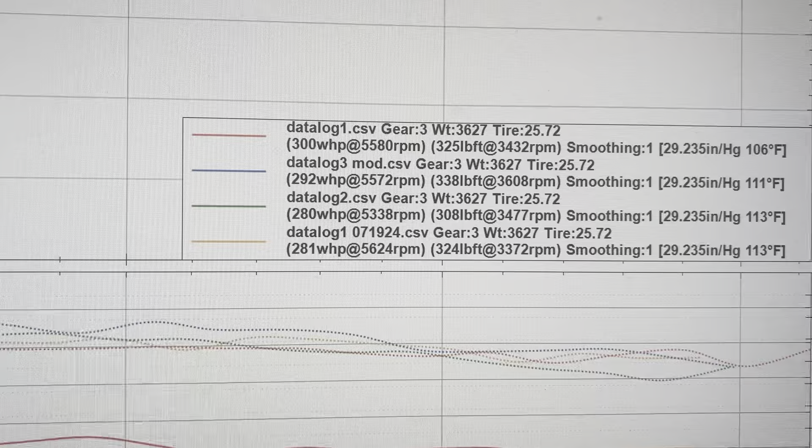The first 2 are 2 very popular tuners. The first one had a tiny bit, not during the pull, but a tiny bit of partial throttle feedback knock.

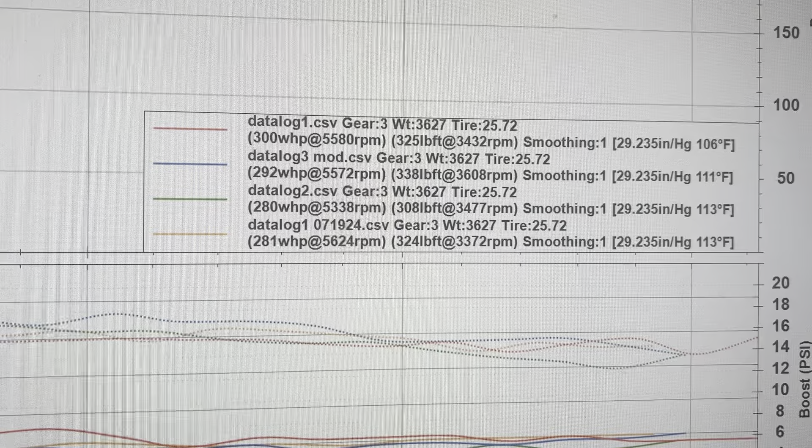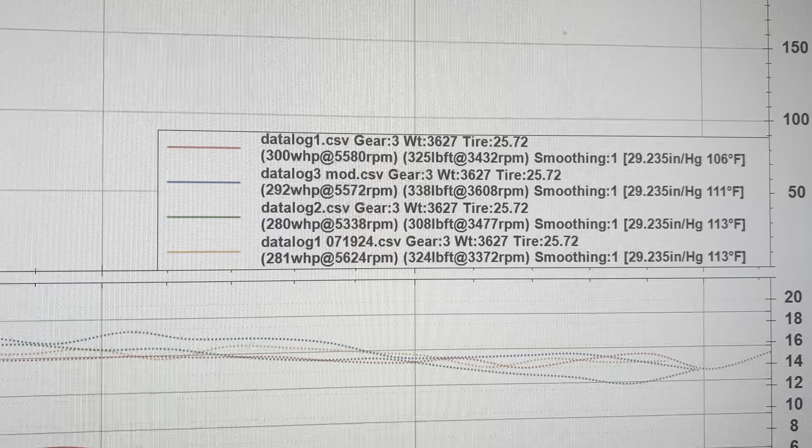You know, a couple hits of like minus 2.11, but very rarely. The second one, the blue, which is probably who I'm gonna go with for a full E-tune, that one's real stable in daily driving. I think I've had very few instances of like a minus 1.1 something, a feedback knock, driving around clean on the pulls.

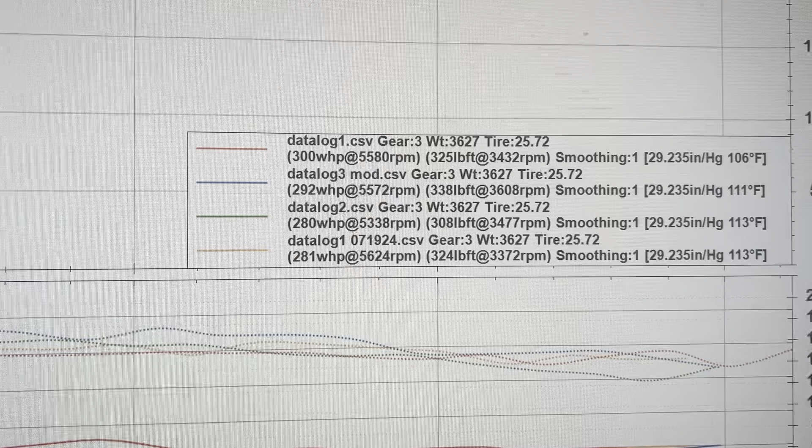All these are on Arizona crap fuel, 91. It's garbage fuel, so it makes this kind of hard, but you gotta see how they pan out. Again, the red and the blue are probably the 2 best ones. I just started running the red today.

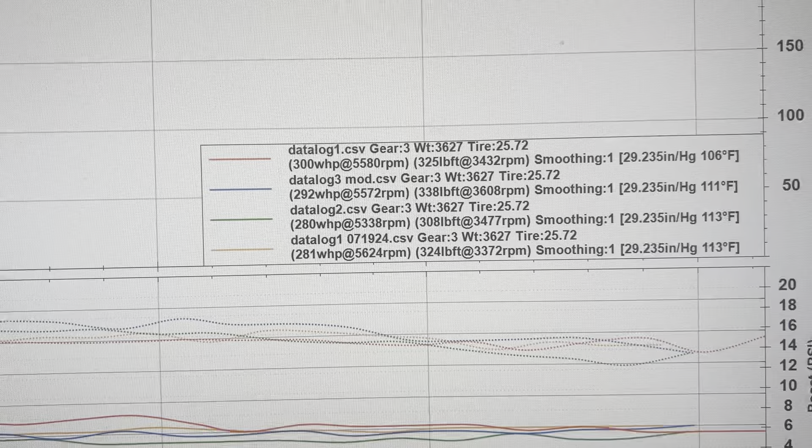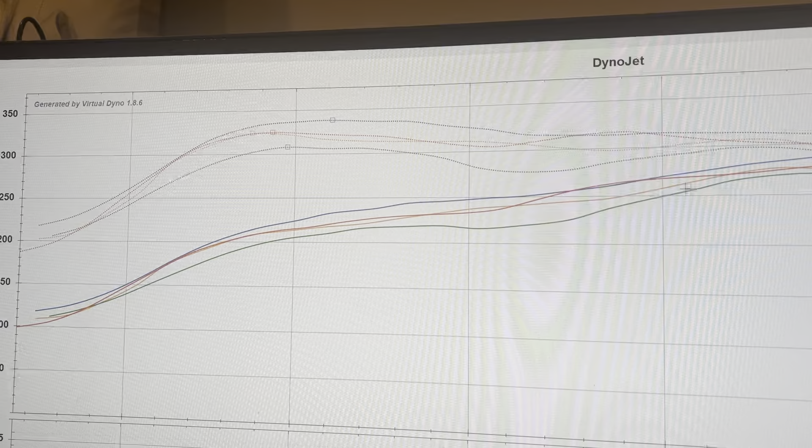Figured I'd try one more tuner, and I'm really on the fence between the 2. They're real close. I get a little more torque on the blue tuner, having run it a little bit longer, kind of in your main driving area here, which picks up a little bit more horsepower. You can see the difference.

The green is another really good tuner, but just a lot more conservative. If you want a really conservative tune, you could email me or maybe post a reply on the YouTube video, and I can give you some information on the tuners.

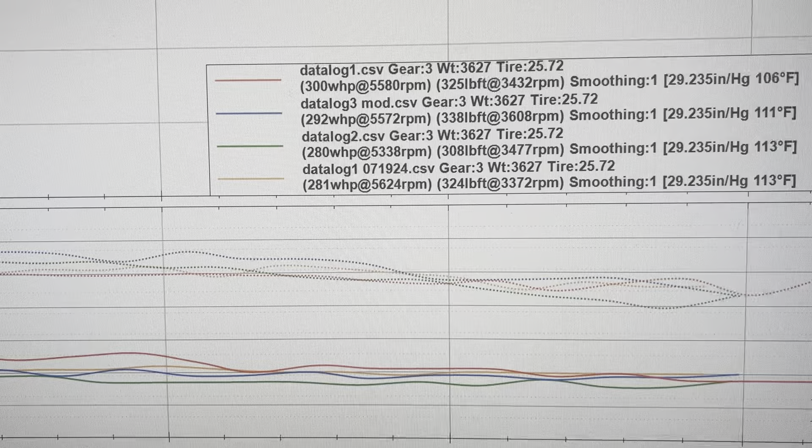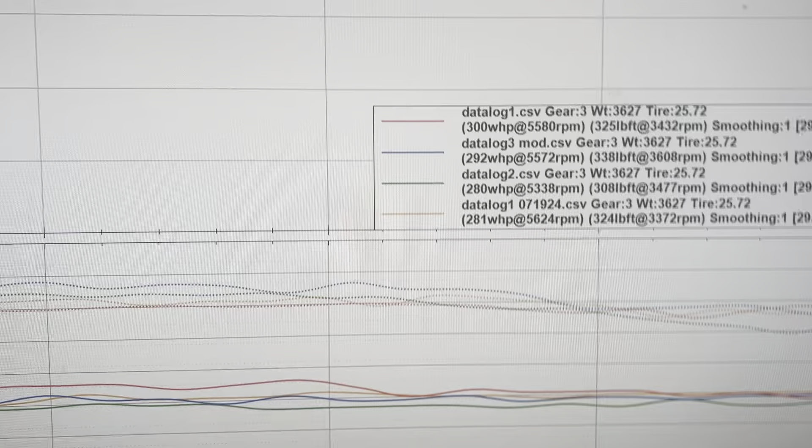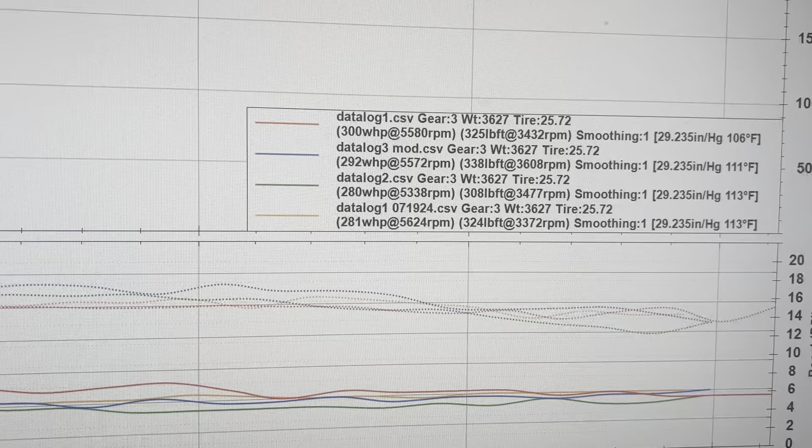And the orange is one that makes a lot of videos. It's an okay tune, but the orange one actually was the only one that I got a lot of knock hits on when driving around regularly, and you can see it's the 3rd least performing, so it really wasn't worthwhile. Mileage is going to vary by car, by fuel quality.

Fuel quality here is terrible. Biggest thing I noticed is the best one, in my opinion blue, which is a little bit lower in horsepower, but again this is street dynoing, so there'll be a ton of variation. The blue one's 2nd run had the most torque, but you can see they're definitely fueling a lot more early on, and they added a lot more boost.

What I will say is the blue tuner runs a lot less timing, and I think that helps with the knock. A lot more boost, a lot less timing, and more fuel. So I think that helps deal with the crappy fuel here.

The second best, or one of the top 2, they're definitely not putting as much fuel in. They're running a couple degrees more timing, and they are running quite a bit lower boost. I think this is like in the 15-16 range, you're in the 18-19 range with this guy.

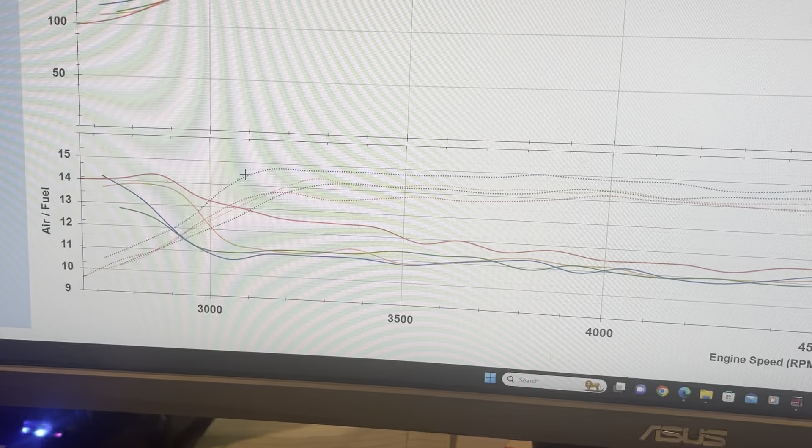So different methodologies. This blue one, because of this torque peak here, is way more fun to drive. If you put it on a track, I'm sure it's not going to make much of a difference, but it is way more fun to drive just feeling that push.

So anyway, if you want more, all these are SAE corrected for the different temperatures, because there was probably a 4 or 5 degree temperature swing between the days. So take the numbers with a grain of salt.

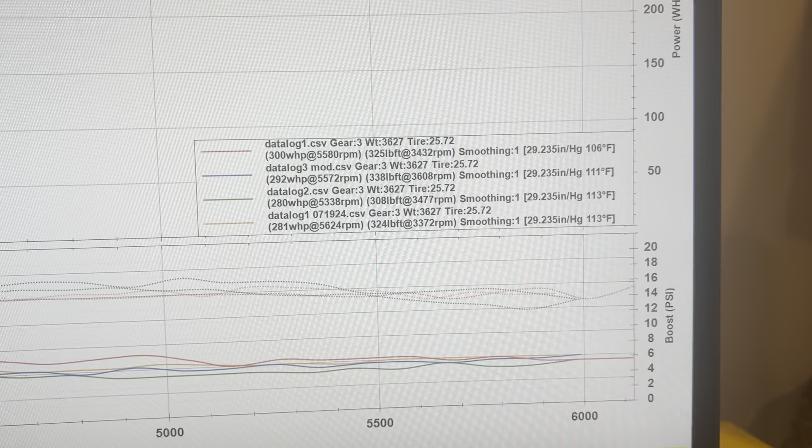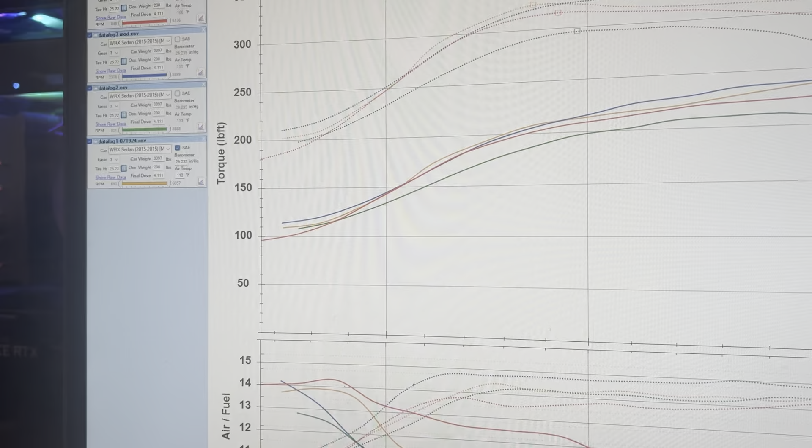And I can do the uncorrected real quick. But yeah, if you want to send a comment or whatever, I can tell you via email who these tuners are, because they're all decent tunes.

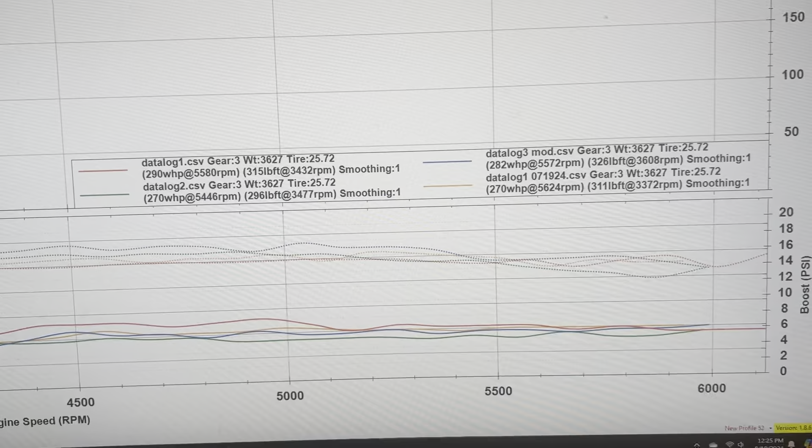Again, the top 2 in my opinion are the red and the blue. The blue is probably who I'm going to go with for an E-tune, but here's the uncorrected numbers. You can still see the blue one still peaking with more torque. That was on a hotter day than the red. So, I guess it's what you're looking for. Fuel economy on the blue one's not as good, but I don't think you're gonna be crazy into fuel economy, and you're not gonna be running it flat, wide open all the time either.

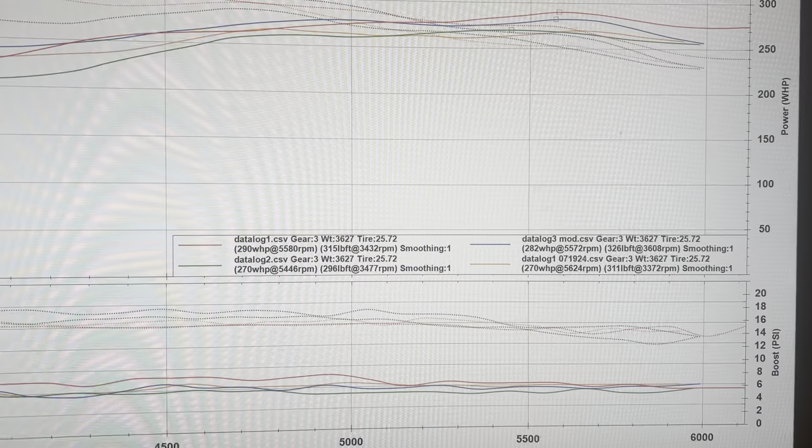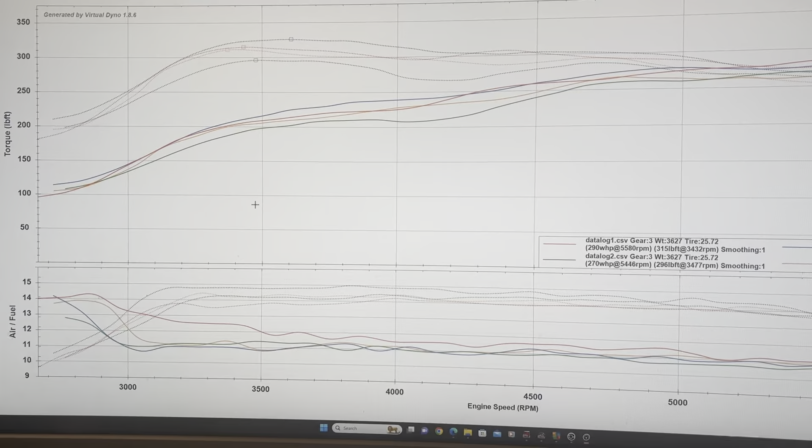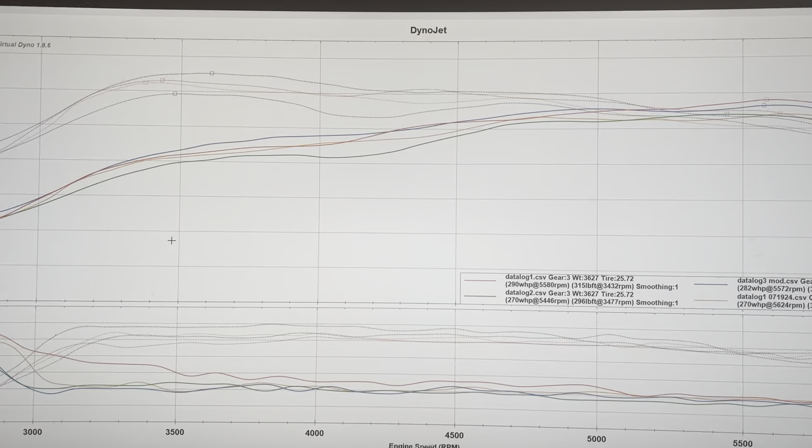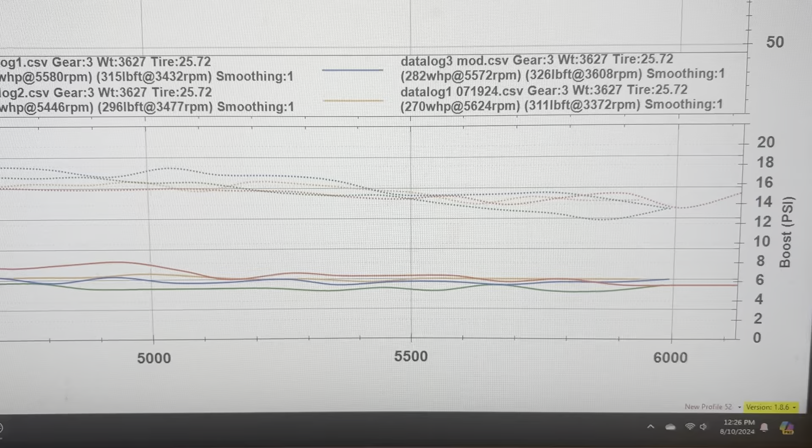The car has a top mount charge pipe, stock intake, but intake pipe, high flow filter. I pulled the carbon trap. I'm trying to think if that's all the actual engine stuff, catback, and I'm going to be putting a Perrin turbo inlet on it just to get rid of the boost leak, and I'm hoping on the blue one I can bring back some of that boost on the tail end and pick up a little more horsepower in the end. So we'll see how that pans out.

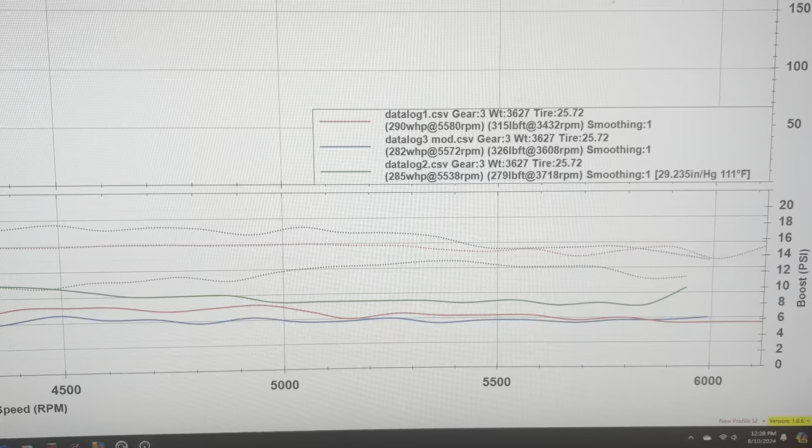Forgot to add the Cobb Stage 0 to get a kind of frame of reference of what the stock would look like. So I put the Cobb Stage 0 in green, red and blue again are the top two that I like. You can see there's a horsepower difference, really isn't that huge.

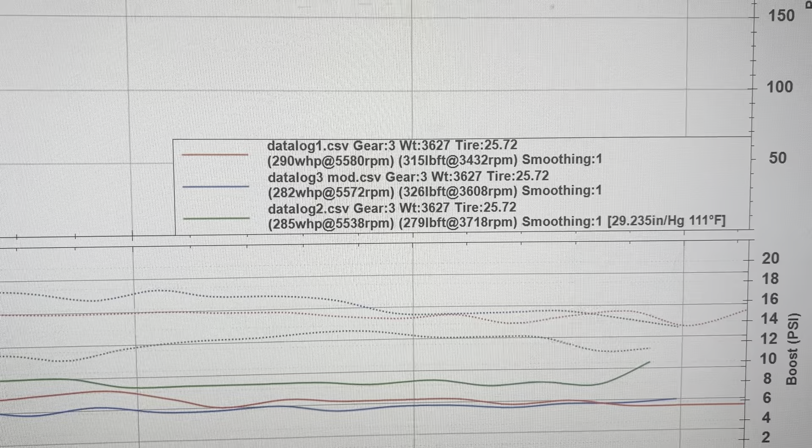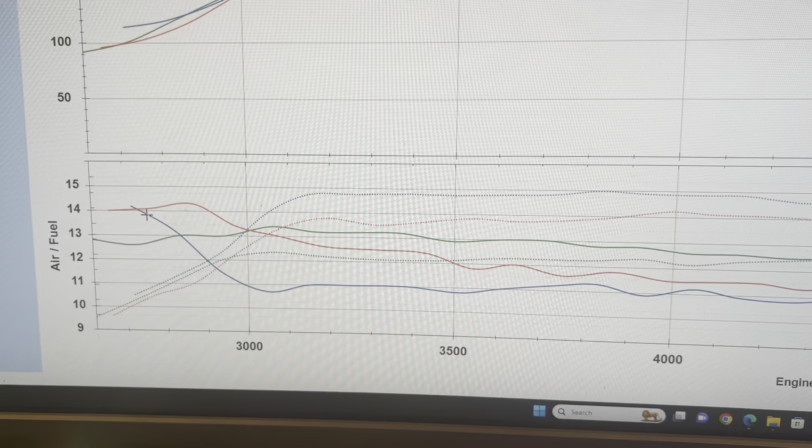And these are corrected again SAE, and I'll drop the SAE correction in a second. But you can see the horsepower difference isn't gigantic, but the torque is significant. Let's see in the plots. And again, all of the power and torque gains are really where you're driving it. Definitely a lot more lean on the fueling from stock, a lot lower boost, you can see in the green.

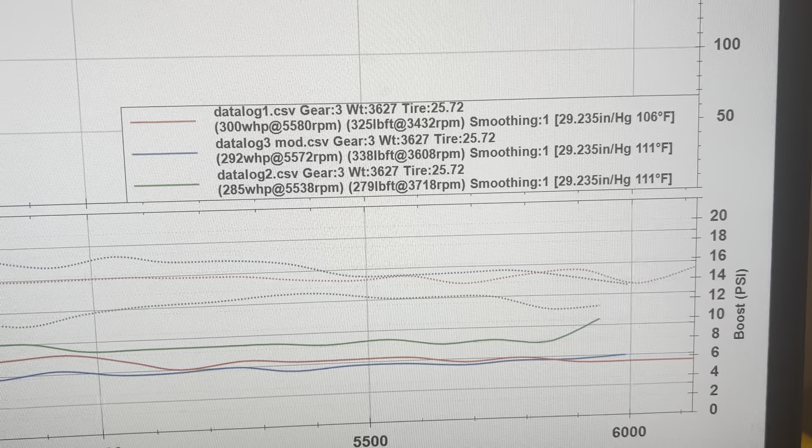Let's drop the SAE. Oh, I don't have SAE in the others. Oh, hang on, a mistake. We're gonna make them all SAE. Okay, we're gonna go back. This is all with SAE correction. So actually there is, that makes more sense. There is a horsepower increase and even more significant torque increase. So this is all with SAE correction.

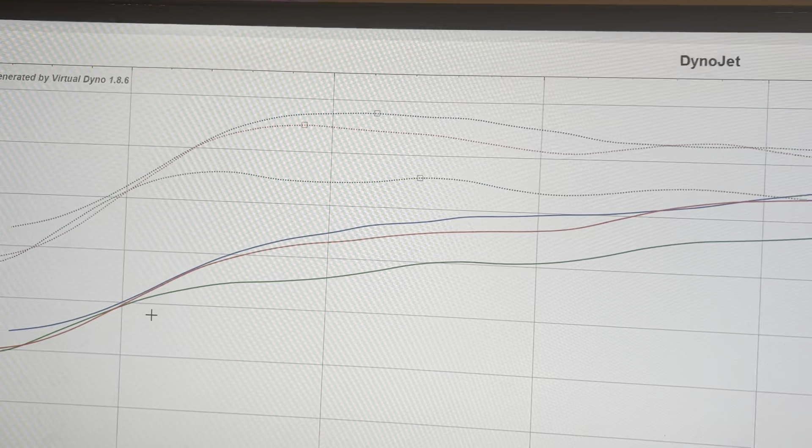Yeah, look at that bump in the torque between the blue, red, and green. Green being pretty much the stock simulated tune. Big differences.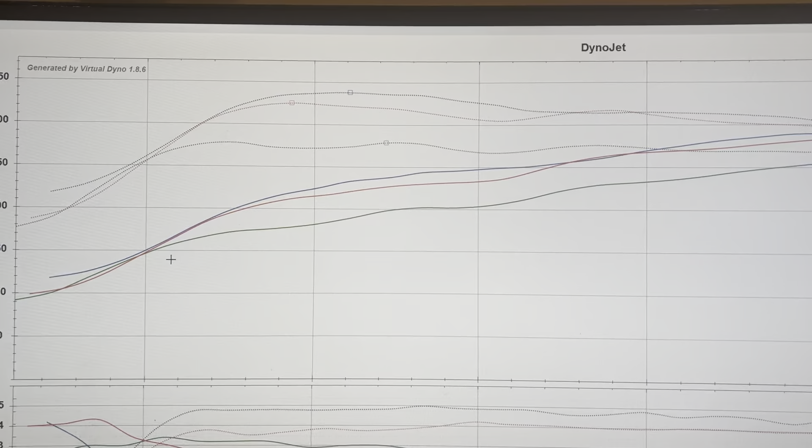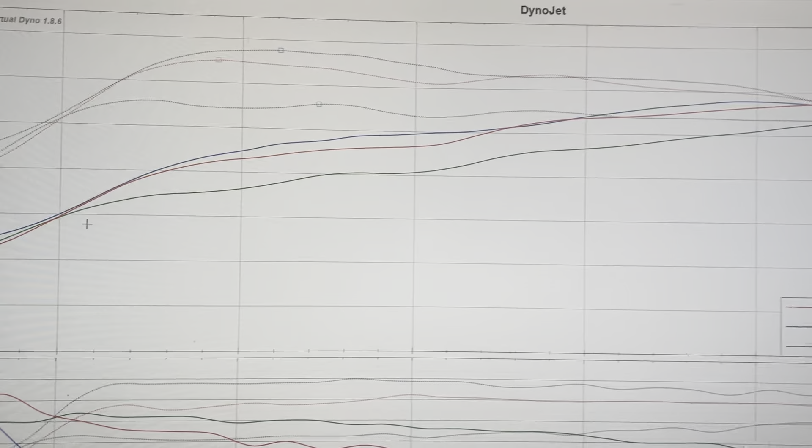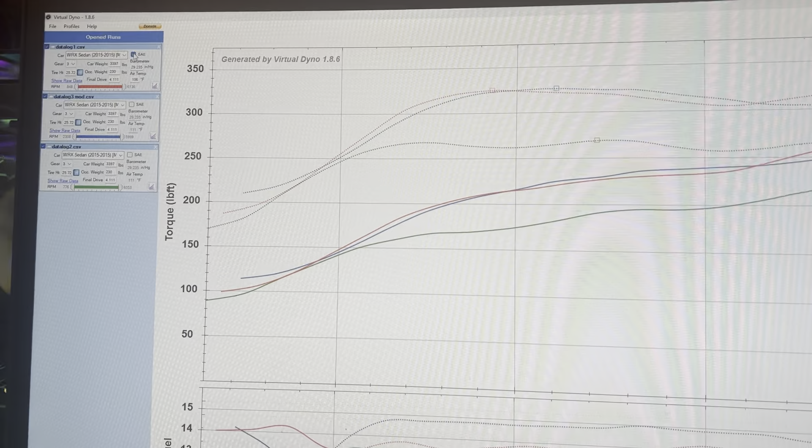And crazy enough, the Stage 0, which is the stock simulation from Cobb, it had quite a bit of feedback knock. The DAM would drop, so I would venture to say that these off-the-shelf tunes from these two tuners are probably safer. Again, that's subjective, but I don't get any significant feedback knock with the off-the-shelf from the tuners, nor do I get really any DAM drops at all.

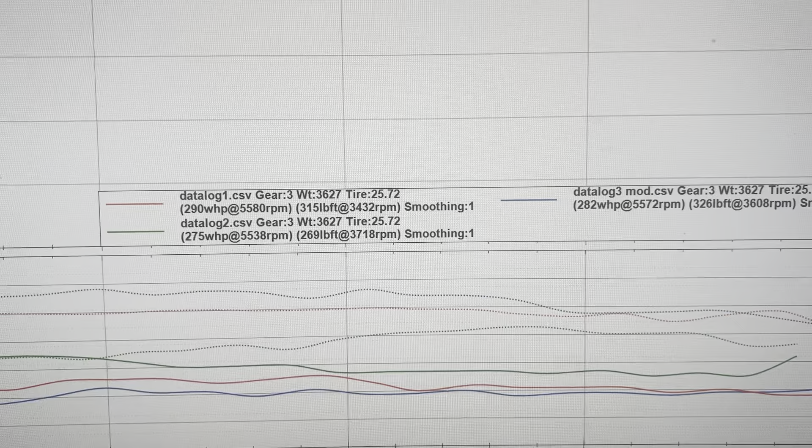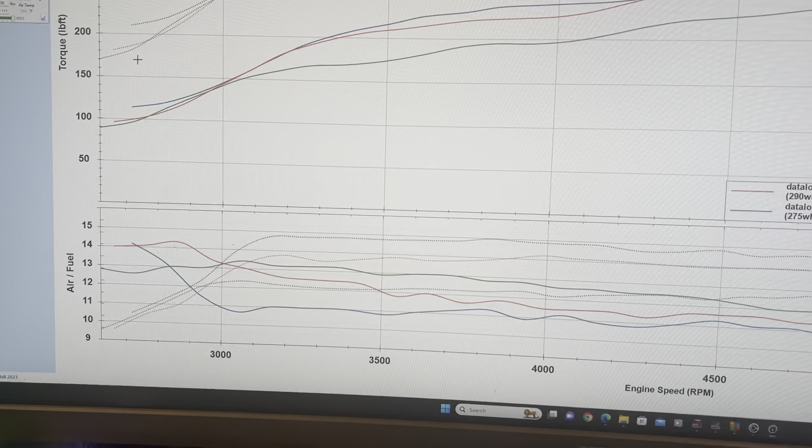I mean, maybe if I had bad fuel, but here's all the SAEs dropped. So this is no temperature correction. Green again is Stage 0. Blue and red are the off-the-shelves that I got. Good, yeah, it's pretty darn good gains. Definitely worth the money. So that's kind of what it looks like compared to the stock.